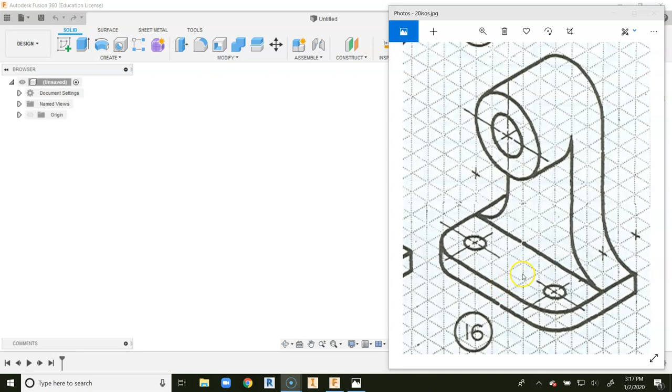One thing we'll do is we'll just go ahead and create the base plate of the object first, and then we'll talk about how to go about creating this more vertical member. Down here on the bottom, we're going to create the base plate, and it's going to have 8 units of width, a height of 1, and 5 units deep, so 8 by 1 by 5.

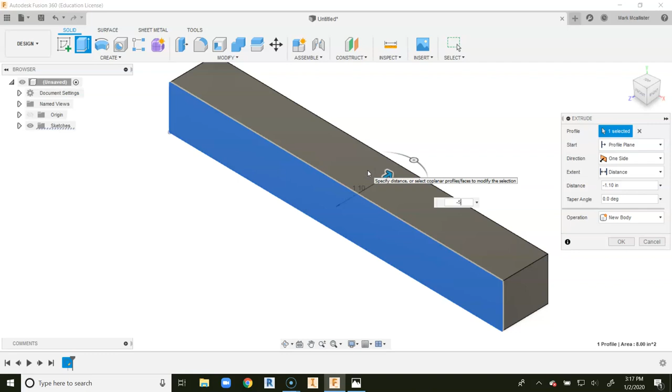So we're going to create a sketch on our plane. I'm going to grab a hold of 2-point rectangle, and I'm going to have 1 tab 8 and hit enter, and I'm going to go to finish sketch, click on my house, go to extrude, and I'm going to drag back and say -5. And we now have for ourselves our base plate, bare bones bottom part of the object.

Now we're going to go ahead and put in the holes of the object, and the diameter of the hole is going to be 1. You can tell this circle fits perfectly inside of one of the isometric squares. The only issue is that the distance in from the reference edges is going to be 1.5. That center point is 1.5 in from the front and 1.5 in from the side.

So we will go up to our hole command, and we will click on the surface we are going to make the hole on, and we want to click on our reference edge, and we're going to put in 1.5, and our next reference edge is right here on the front, and we're going to put in 1.5. The diameter of the hole, when we scroll down to get to the diameter, is going to be 1. We're going to go ahead and say OK.

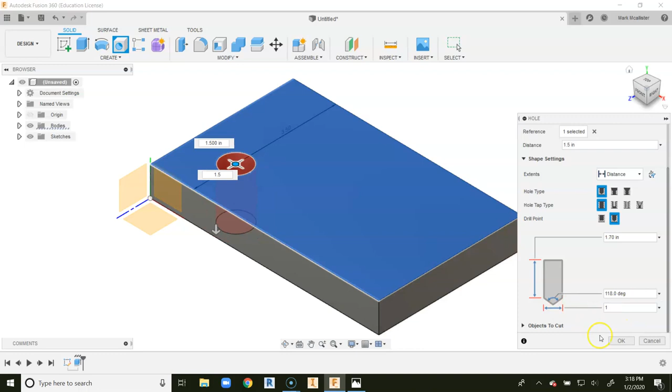We're going to place another hole. We're going to go to hole, on the surface, reference edge, 1.5. The front reference edge is 1.5. The diameter of the hole, again, will be 1. Say OK. So we now have ourselves 2 holes placed at the correct reference edges.

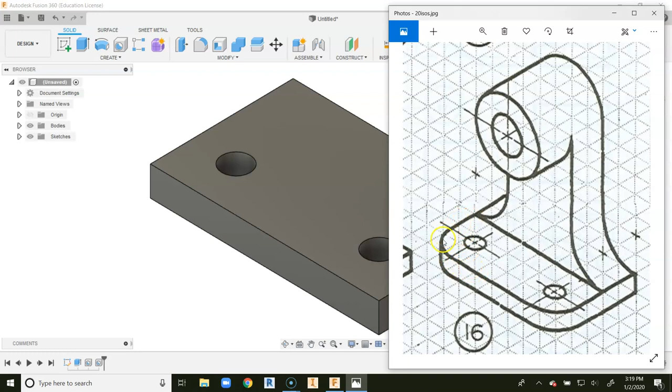Down at the bottom, we want to take a look at these fillets that we've created. And the fillets are going to be 1.5 also. You can kind of see this little reference center point, it's a point of tangency. Once this stops curving and turns straight, horizontal or vertical, that's a point of tangency. Our radius for these fillets is going to be 1.5.

We're going to go up to the fillet, and we're going to click on our edges we want to get rid of, and our radius will be 1.5. We're going to go ahead and put in 1.5 and hit enter.

After we click enter, we want to go back and take a look at our 20 ISOs object here, and we want to go ahead and create this rectangle back here, but we want to ignore what I'll call these skateboard ramps. We kind of want to ignore this additive fillet in here, and we want to find out that this actually turns tangent 2 squares in.

So if I follow this 2 squares in and come up vertically, we can tell that this line turns to be a solid part of the object right here. The middle part that has really no fillet added to it is just going to be 4 wide. So we have 1, 2, 3, 4 right in here.

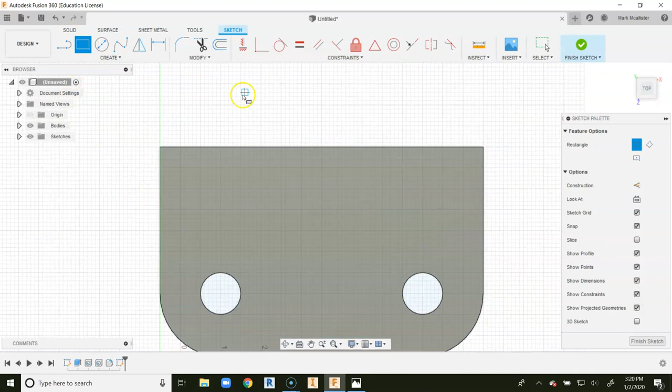We're going to go up to create sketch and click on the top of the object. We're going to go ahead and go up to 2-point rectangle, and we want to click on 2-point rectangle, and we're going to click and drag in. Now the width was 4. So in this case, the depth is 2 and the width is 4.

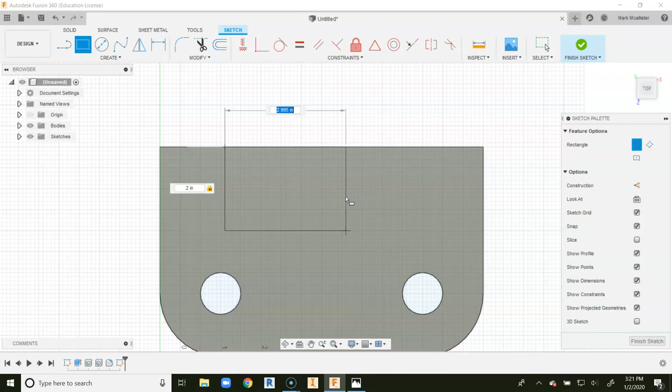We can tell that by the distance from here to here is 2 and the width here is just going to be 4. So back into our object, we're going to come back into Fusion 360, and we're going to put in 2, tab, 4, and hit enter. You're going to notice how we're kind of off-centered here. Now we could find a way to move this over through using geometric constraints, but an easy way, since the whole object is just 8 wide, is we can just go to dimension and say from here to here is going to be 2.

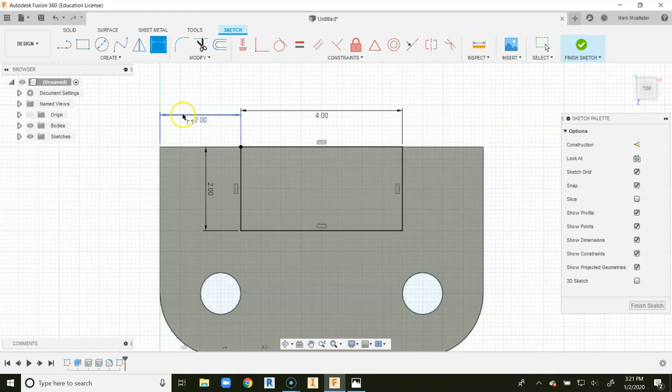You'll notice that this automatically centers the object. We're just going to keep that right where it is, and we'll go to finish sketch. Now we have our rectangle here in the middle.

The toughest part of creating this is finding the vertical height I'm going to walk this up. We said we'd count in 4 to the middle, so 1, 2, 3, 4, and here I'm in the middle of the object. If I go back a distance of 2, I'm at the back of the object, right in the center. I want to count up the number of cubes here, but counting all the way back to the top.

So if I come up 2 here and go back 4, the full depth, I'll stop counting right here. At this point, I'm going to count back 2, and count straight up until I hit the top of the object. That's 1, 2, 3, 4, 5, 6, 7, 8, 9 — 9 cubes tall. I'm going to go to extrude.

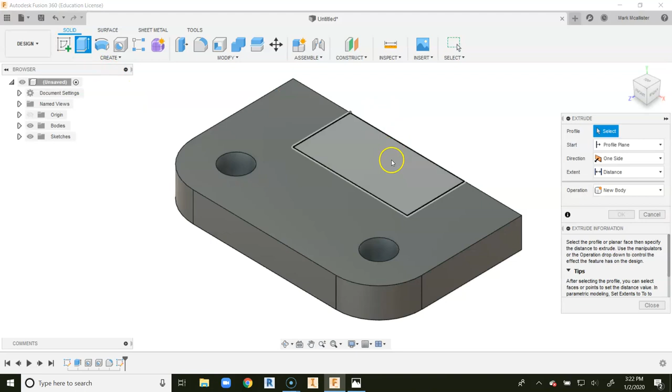I'm going to click inside the object, put in the number 9, and hit enter. It's a bit of analysis of an object — when you take a look and try to find something, you have to find points on an X and Y plane to give you a precise coordinate for how tall something is.

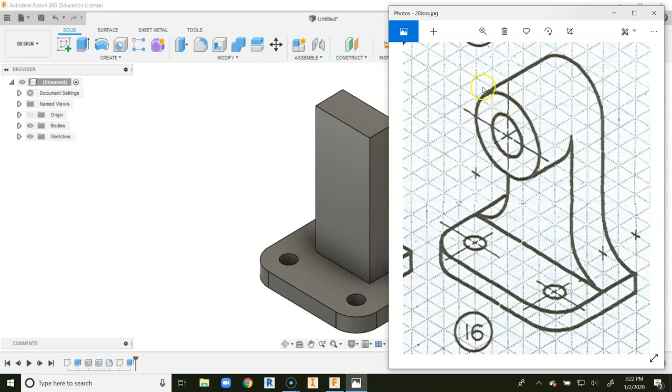Our next step is to fillet off a radius of these edges. We want to round off these corners, and that's going to be a fillet radius of 2 — 1, 2, fillet radius of 2.

We're going to go up to fillet, click on our edges here and here, put in a radius of 2, and hit enter. Automatically we know we have the right radius because we don't see any overlapping here and we don't see a line.

Now what's neat about fillets is they can also be additive. As you see right in here, we're going to do an additive fillet — basically like if we took clay and added it in this corner, smoothed it out, it would be like a skateboard ramp.

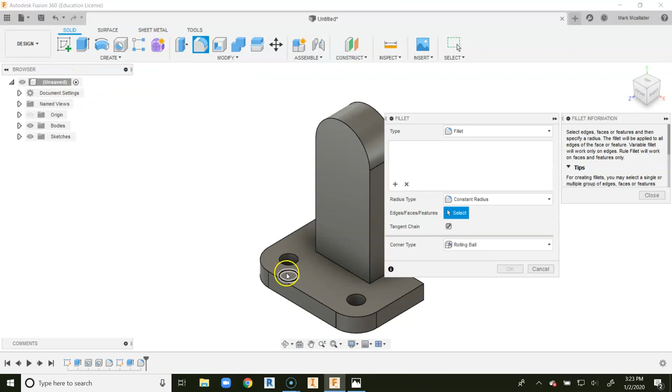So we come up here and go to fillet again. We click on our edge here, use the view cube to come around to the other side, click on the opposite edge, put in 2, and you'll notice it gives you an additive fillet. Additive means it adds mass to the object. I'll go ahead and say enter.

And now we have this kind of back plate. It kind of looks like an old grandfather clock shape.

We're going to draw ourselves a circle and extrude it out a distance of 2, so we have this circle back here on the back. We need to come out a total distance of 4.

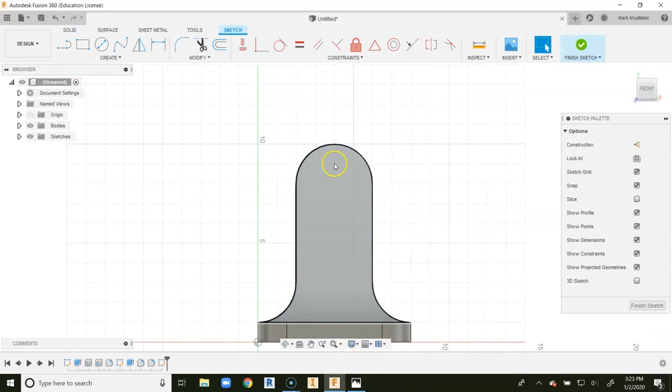So we come up and click on our sketch, click on the front of the object, and go to our circle. We need to find the center point of the circle. Automatically it references this blue dot right here in the middle, and all we have to do is click and snap. Makes it pretty easy. We're going to go to finish sketch.

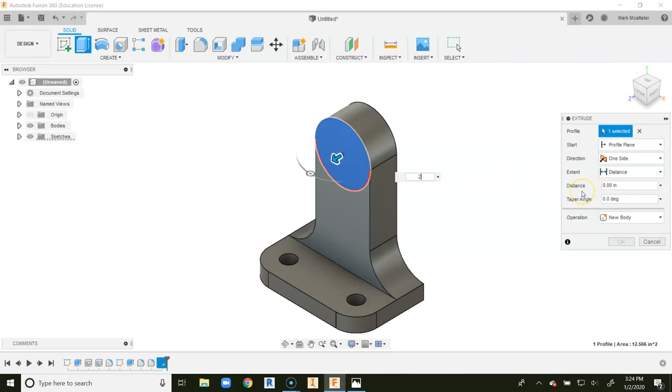We're going to go to extrude. Let's click on our house just to take a look at exactly what we're looking at in 3D, and we want it to come out a distance of 2, and hit enter. Now we have this object.

The only thing left to do now is create that hole, and the hole diameter is going to be 2 — the radius is 1, where diameter is the distance from one point on the object to the exact opposite point, passing through the center point.

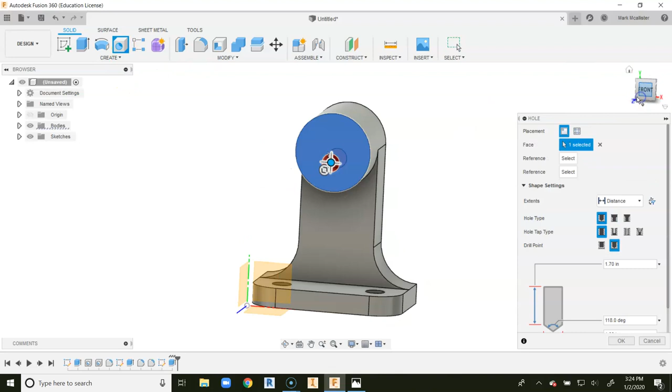We're going to go up to the hole command and click on the front face of our object. One nice thing about going to the front view is you can see me drag this up, and it snaps to that center. We'll scroll down over here — the diameter is 2, and the distance is going to be all.

Say OK. We click on our house button, and automatically right here you can see that we have now created it.